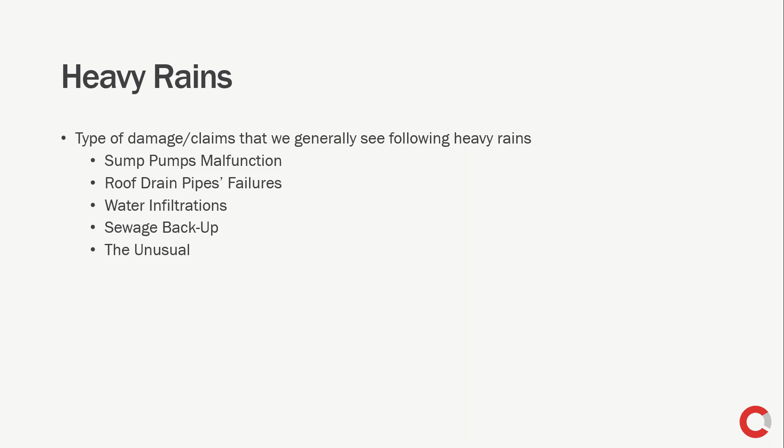I divided my presentation into 3 sections, and the first one is dealing with heavy rains. We all know when heavy rain occurs, water penetrates everywhere, water travels easily, and it can cause significant damage. The typical claims that we encounter when there is heavy rain are sump pump malfunctions, roof drain pipe failures, water infiltration, sewage backup, and as you will see later, the unusual.

The first case study refers to a residential place here in Ontario. It was a small home, and during a severe storm with wind and rain, a tree fell onto the roof of the house. It damaged a portion of the roof and left a portion of the attic space exposed to the environment.

The homeowner requested the insurance company repair the entire duct conduit inside the house, claiming that because the attic space was exposed to the environment, it caused significant damage. There was no doubt that the section in the attic space exposed was damaged by exposure to environment. However, the insurance company was not so sure about the rest of the air duct, so they contacted us and asked us to conduct a thorough investigation of the duct in this home.

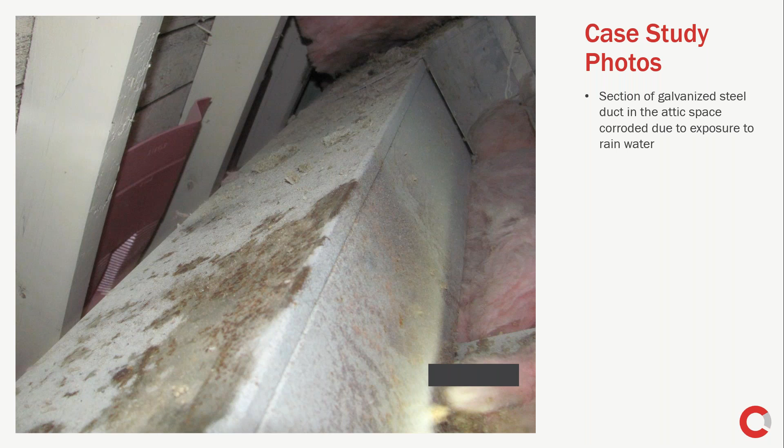So we were equipped with a snake camera, and we went from the roof to the basement and inspected the entire conduit. I'm not going to show all the pictures that were taken, just a few relevant ones. We started in the attic space, and you can see in this image the duct is compromised by exposure to water.

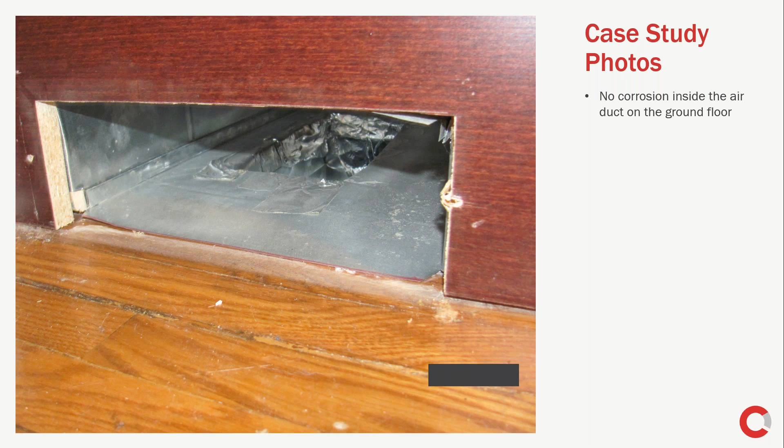Further down, the duct seems to be clean. Considering the age of the house, 40 to 50 years, the condition of the duct is exceptionally good. There is no evidence of significant corrosion or other type of degradation. Moreover, in one section there are spider webs, so when you have water, you don't have spider webs.

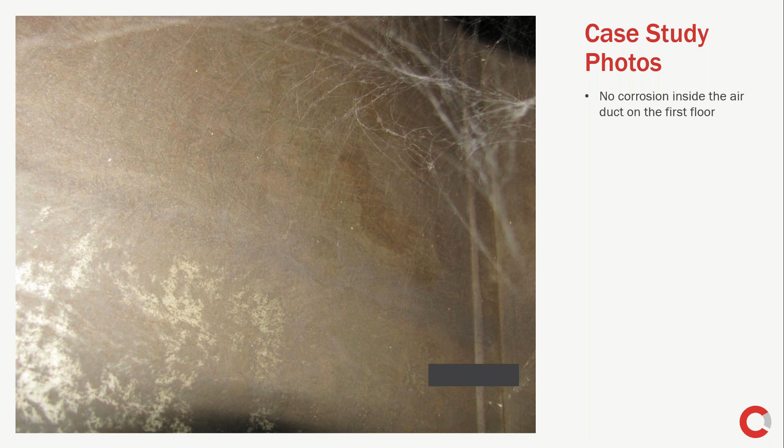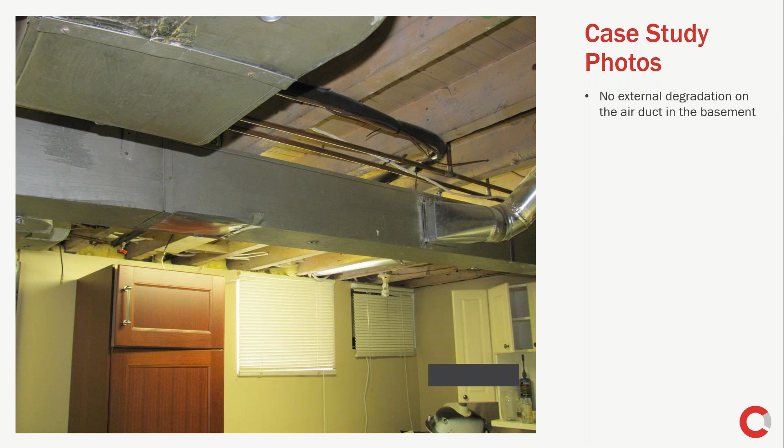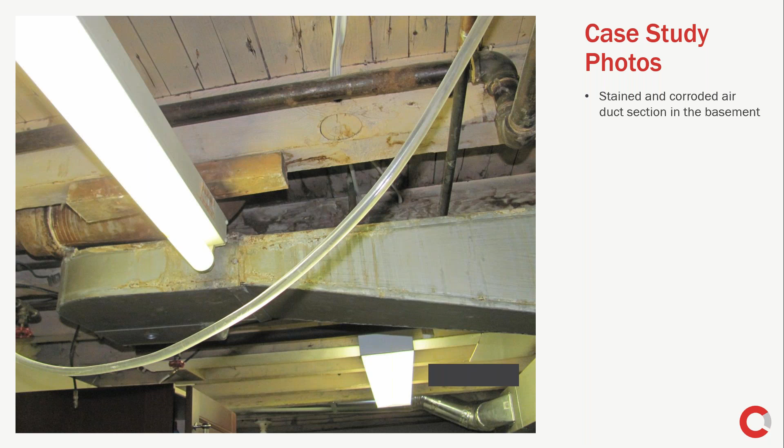I went further down to the basement, and as you can see, the duct in the basement seems to be in good shape, except for a small section which was severely corroded and stained. A close-up view of the degraded section is in the next slide, and you can see the severity of the degradation.

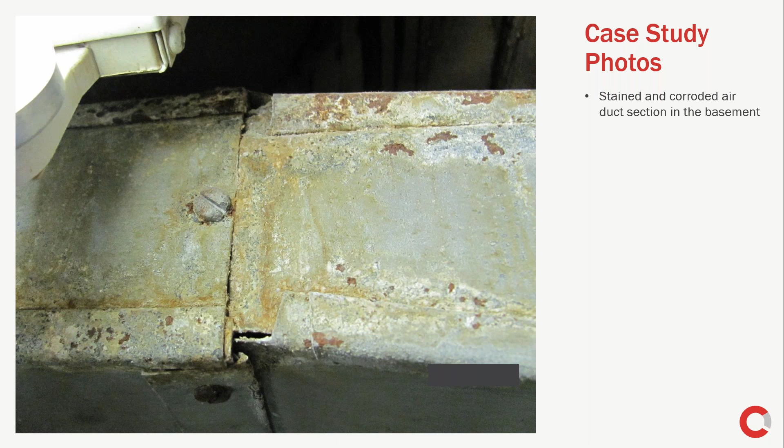So what happened here is the flange degraded, the floor degraded. So every time the toilet was flushed, some of the products ended up escaping and ending up on the duct. So there was no damage associated with the storm or with the fallen tree. It was a historical degradation, and it was negligence on the part of the homeowner.

At the end of the day, based on my comments and observations, the insurance company decided to compensate for the damaged duct in the attic space. However, there were no compensations for the historic damage to the remainder of the duct.

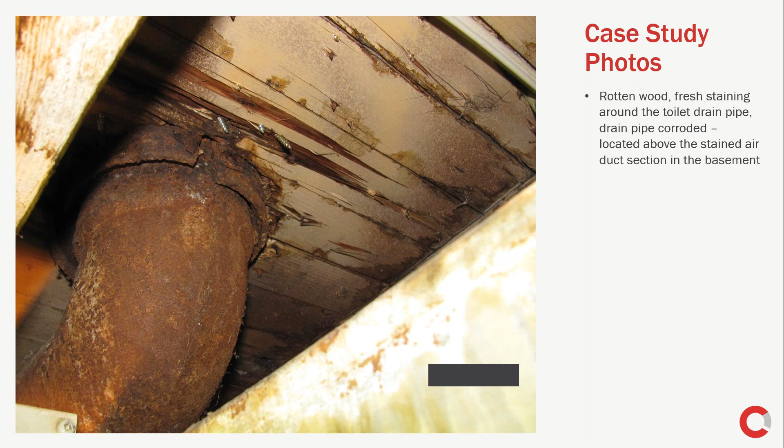Ice can cause a lot of damage inside the pipes because it expands; water expands 9% upon freezing. Ice can also cause damage on the outside to roofs and other structures. Typical damage claims we generally see coming from the formation of ice are frozen sprinkler systems, collapsed structures, frozen pipes, and other plumbing fixtures and appliances.

Freezing in homes can occur if a furnace malfunctions. This can happen if the air intake is blocked by ice formation. Basically the furnace is, for lack of a better word, suffocated. It has no air to breathe, it cannot function, and it eventually stops. This happens quite frequently when there is ice formed on the intake or snow accumulation.

Ice can cause damage on heat pumps even outside the cold season. I was asked numerous times, how can a heat pump freeze when it's summer? This can happen if the refrigerant level is too low, the evaporator coil is dirty, or there is poor airflow. I'm sure you've all seen ice on the air conditioning unit outside your home during summertime. This means the air conditioning unit needs to be looked after, so freezing during summertime is quite possible.

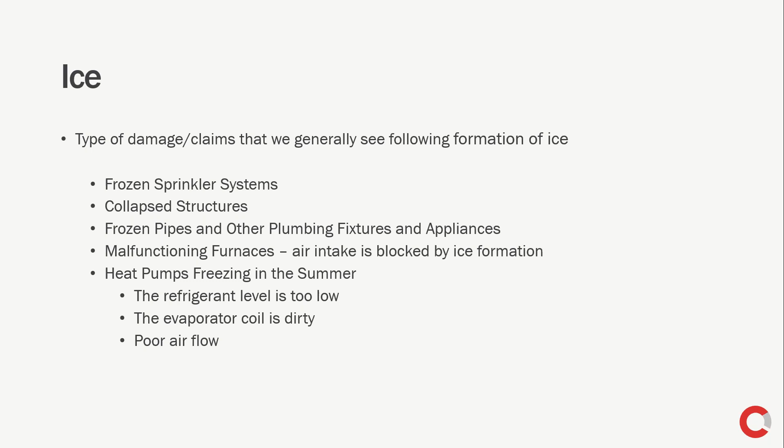The next case study I'm going to talk about is associated with a distance marker installed on a rowing course. On rowing courses, distance markers are installed every 500 meters from start to finish, helping participants know exactly where they are.

One March a few years ago, this particular distance marker simply disappeared from the lake. One day it was there, the next day people walking in the park noticed it was gone. What was left visible from the surface of the lake is one leg. The yellow ball and the red flag are installed to prevent accidents because it was very close to the surface, and to prevent injuries. It was marked so the participants on the rowing course could bypass it.

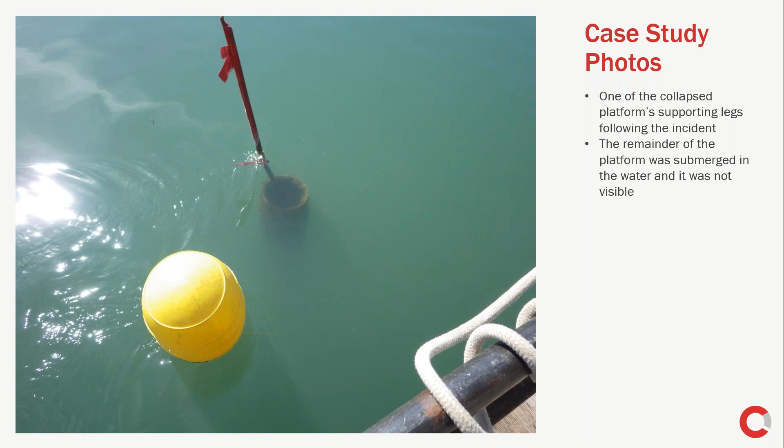The problem was that the entire structure was below the surface of the water and there was nothing visible. So we attended the site to retrieve the structure. This is me geared up, ready to jump and retrieve the platform from the bottom of the lake. Just kidding.

We retained the services of professional divers who helped us retrieve the structure. The job was a very difficult one. It was challenging because the visibility underwater was close to zero. There were some currents and some metal remnants which nobody knew how they were arranged. As you can see, the diver has safety features like a lifeline, two breathing lines, and a communication line.

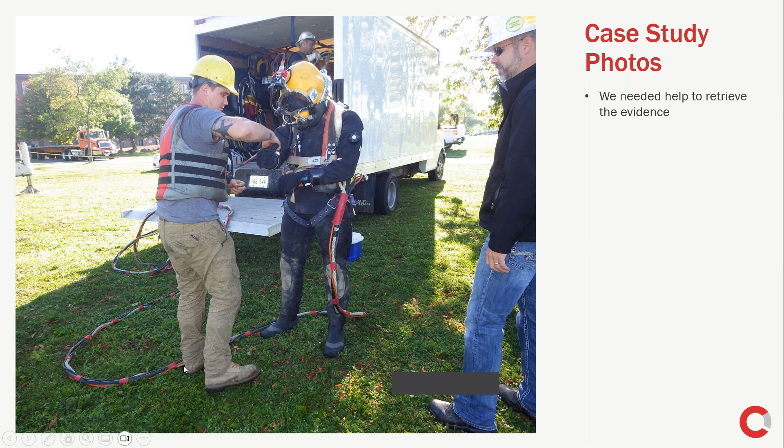So with their help, the remainder of the structure was fished out from the lake and brought to the shore. The incident occurred in March and we retrieved the platform in September. So the platform remained submerged underwater for several months, a condition which changed its appearance.

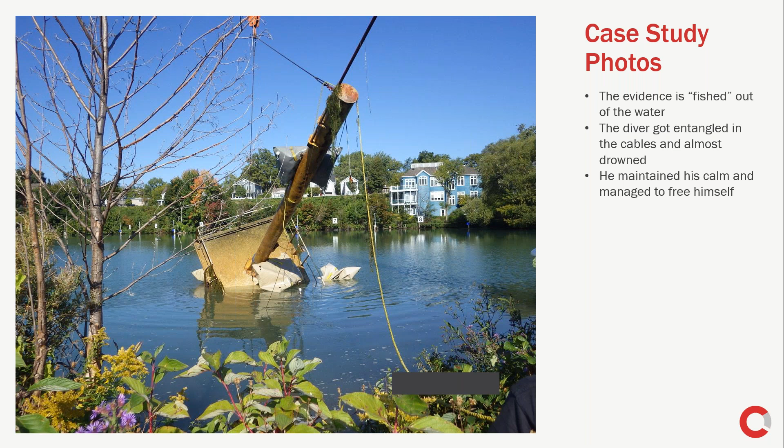The platform was brought ashore and we looked at it. It has 4 legs, and you can see 2 of them were severed. One was bent and mechanically deformed, and the 4th one is in the shadow and not visible, but it was damaged as well. Because it stayed submerged underwater for such an extended period of time, the structure was covered in algae and mussels.

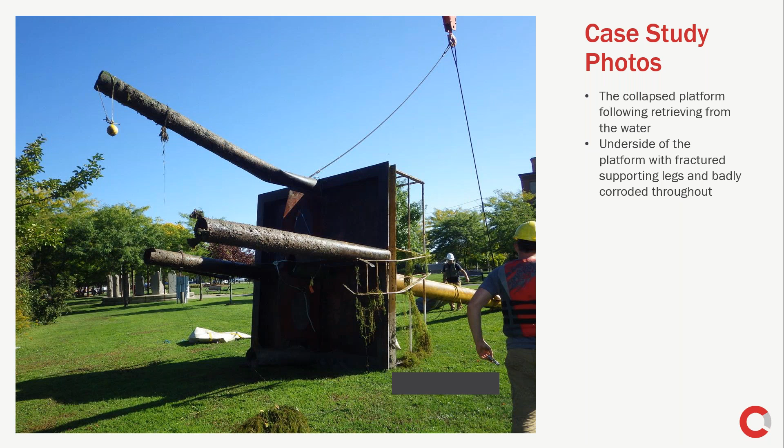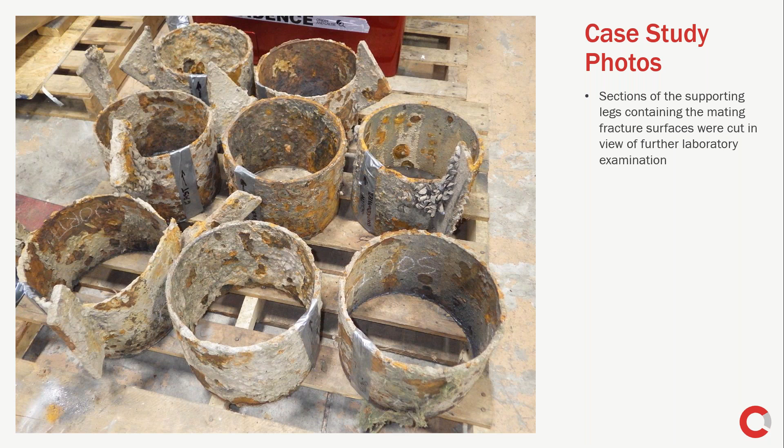It was a difficult task to look at the fracture surface because of severe oxidation and degradation. We cut small sections from the legs and tried to determine what could happen to the platform that caused it to collapse. Cleaning was very tedious because of the extensive damage to the fracture surface. We used special chemicals and managed to look at the fracture surface. This is the appearance of the fracture surface, of the small sections, before being cleaned.

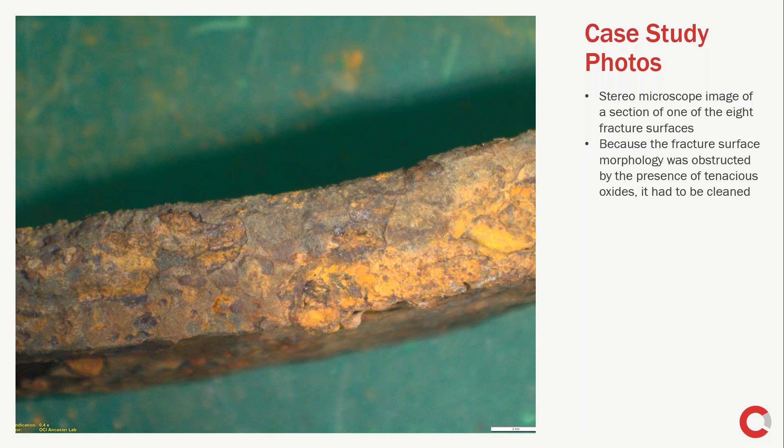After ultrasonic cleaning, we took the samples to be examined under a powerful microscope called a scanning electron microscope. This microscope allows us to examine the fracture surface and features at higher magnification.

The platform was made of carbon steel, which is the most common steel that one can encounter. This carbon steel, when subjected to stress, usually fails in a ductile manner. It means that it has some plastic deformation, some yielding before the final fracture.

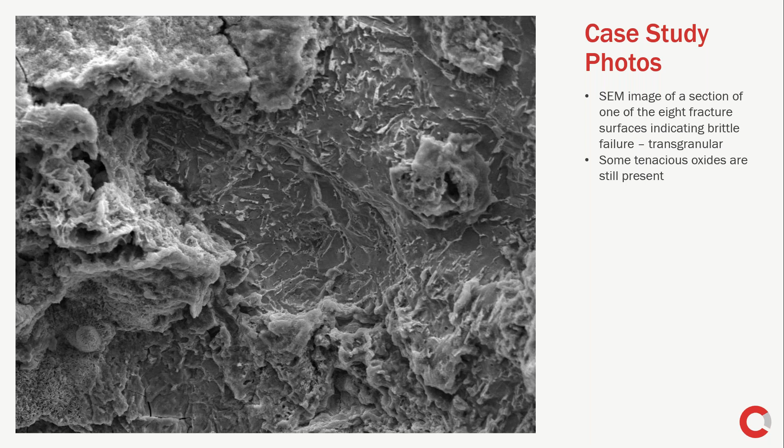However, in this particular instance, when I looked at the fracture surface under higher magnification, I saw typical features associated with brittle failure. What it means is there was no deformation. The fracture was like a glass fracture. It happened all of a sudden without any plastic deformation.

And this tells me -- we also looked at the microstructure. Every material is made out of grains, like ingredients in a food. You put ingredients together and you get the final mixture. Same thing applies to materials and alloys, and carbon steel is one of the simple alloys which consists of 2 phases. There was nothing wrong with the microstructure; no gross metallurgical deficiencies were observed.

So there was nothing wrong with the material. However, it failed in a brittle manner, which it shouldn't. I checked the weather reports, the historical weather in the area at the time the platform collapsed, and I found out that it was very cold and there were strong winds.

So based on an analysis of the condition of the platform, the fracture surface, and weather conditions, I concluded that the incident happened because of ice impingement. In other words, the lake was covered in a thick layer of ice, and because of the winds, the ice was pushed against the legs of the platform, making it collapse.

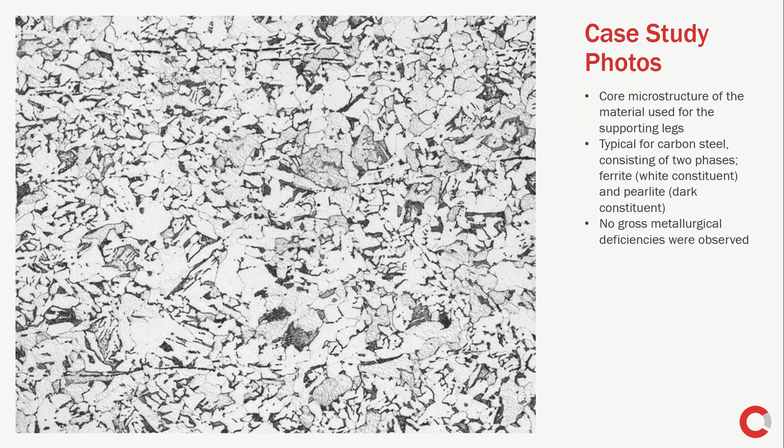The next case is an interesting one, involving freezing rain, ice accumulation, and strong winds. It's an incident which occurred at a golf range located somewhere east of Toronto.

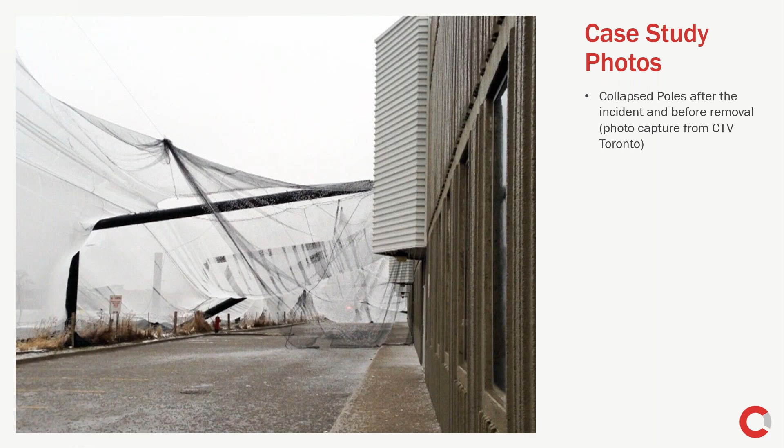During a severe storm and winds, the poles and netting collapsed onto the close by building, causing significant damage. This image was taken from CTV Toronto, because by the time we were assigned to this claim, the site was cleared for safety reasons. At that time, there were strong winds and freezing rain, and you can see ice pellets on the ground. By the time we arrived, it was nice, shiny, and sunny, and this is how we saw the site.

You can see that only one side of the netting collapsed. The other one remained intact.

The steel poles holding the nets were brought in from California and were welded from 3 sections. They were welded by the manufacturer, not on site, so they were just planted here. They were brought already welded, planted here, and then the netting was connected.

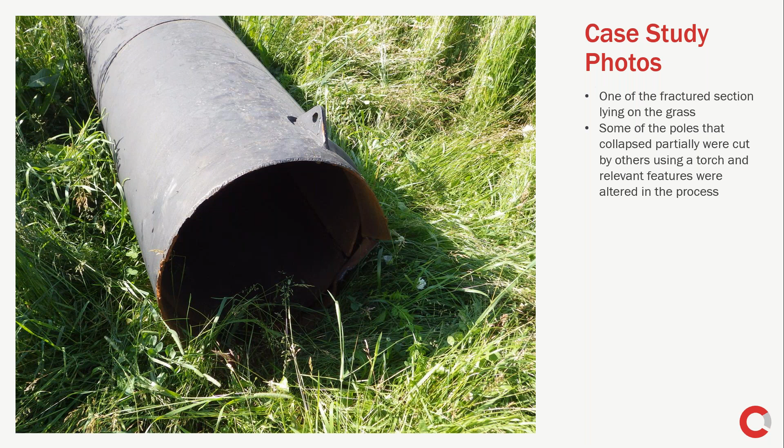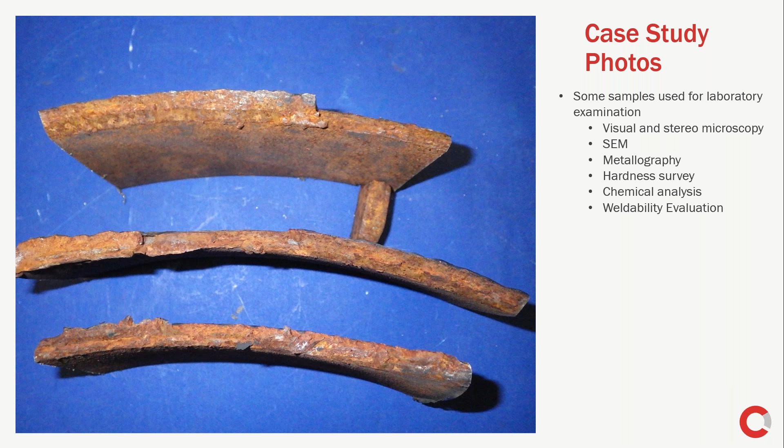It was a joint examination with other parties, and we jointly selected the samples for further lab examination. The lab examination included visual and stereo microscopy in as-is and clean condition, examination of the fracture surface under scanning electron microscope, metallography to check the soundness of the microstructure, hardness survey to check the heat treatment of the steel, and chemical analysis to determine whether the chemistry conformed with the designer specs, as well as to check the weldability of the steel. These are a few samples we selected for examination.

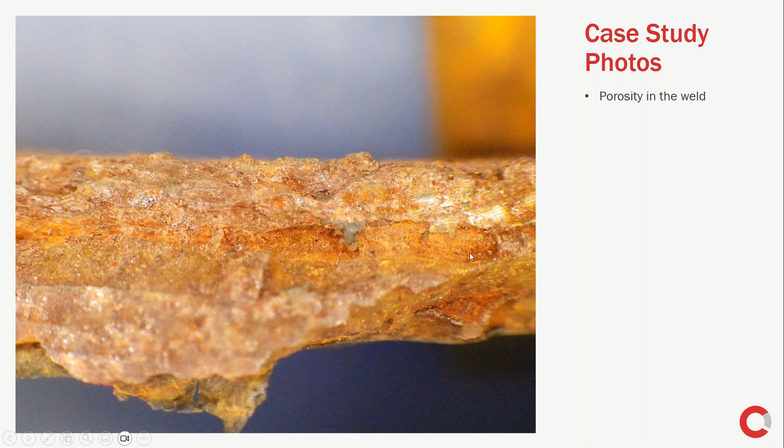Looking under the stereo microscope, we saw large voids in the weld. These are undesirable features because they act as stress concentrators and diminish the load carrying capability of the weld. Further examination revealed not only large porosity, but also inclusions, which are also undesirable in a weld.

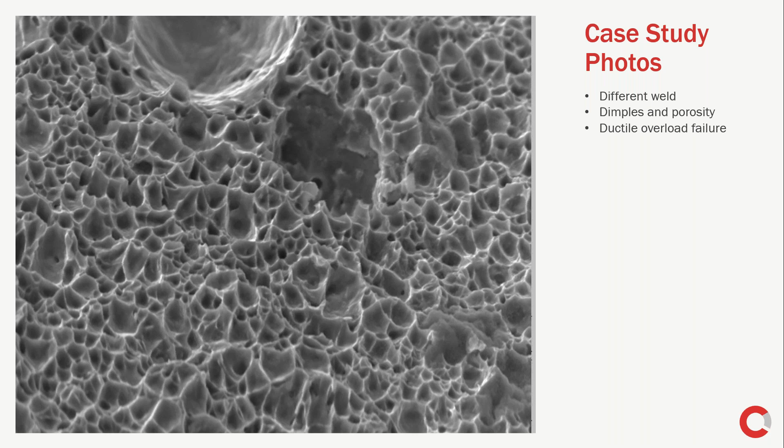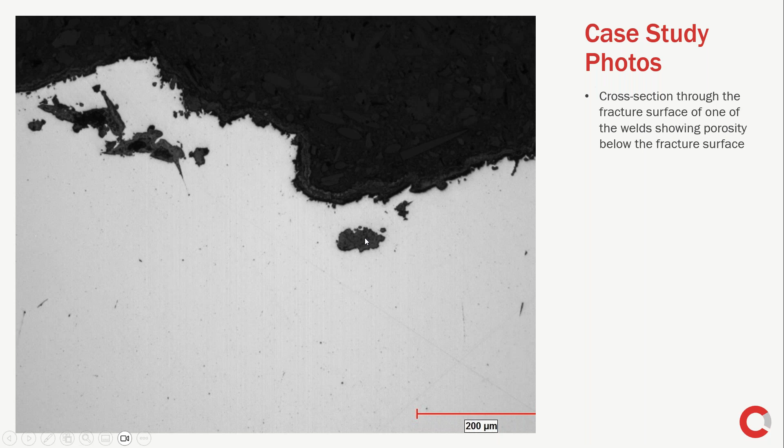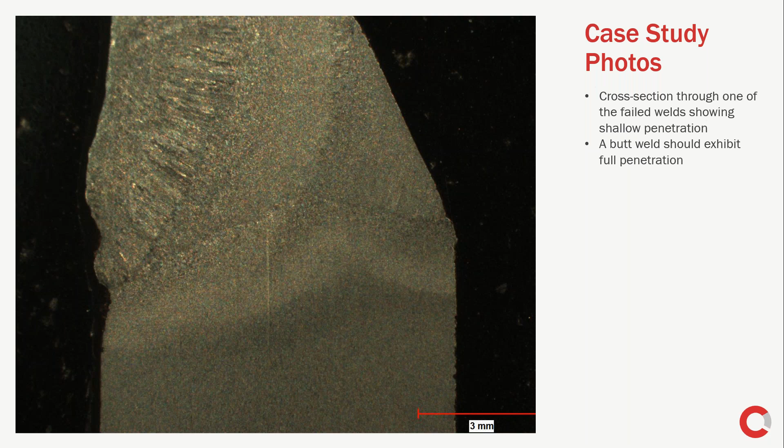Further metallurgical examination in the cross-section revealed porosity below the fracture surface. This is the fracture surface on top, and those dark features represent porosity, which is undesirable. The weld between the sections should have shown full penetration; however, it shows only shallow penetration, so the weld was substandard.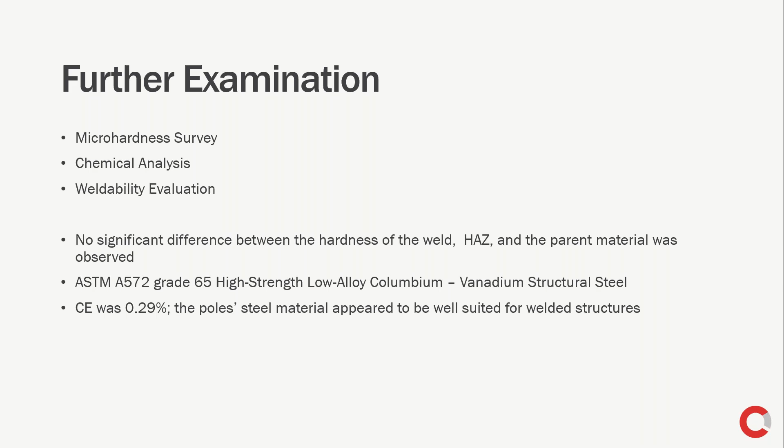We conducted a microhardness survey, chemical analysis, and weldability testing. We did not find any significant difference between the weld material and the parent material. The steel was fit for the application and was weldable. It must be said that some alloying elements make welding more difficult or impossible, but in this particular case, the material was weldable.

The conclusion was that the failure appeared to have occurred by dynamic overload at the welds. It was not only the ice formation on the netting, but also the drag caused by the wind. The failure was possible because of a combination of factors, like undesirable defects in the weld associated with the weather conditions.

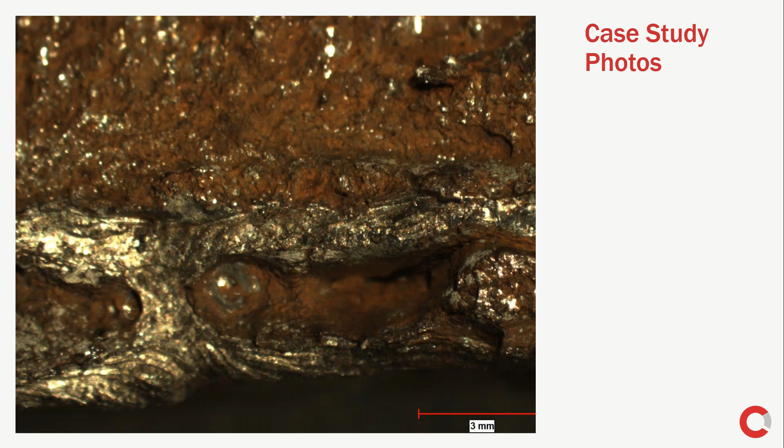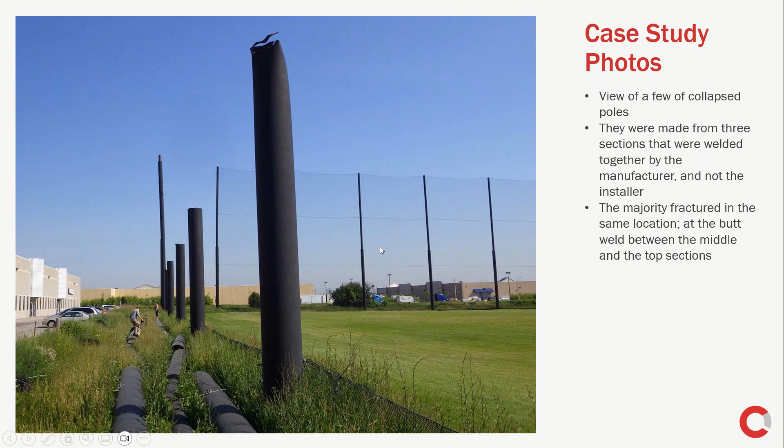People were asking, the insurance company asked me, how come only one side of the netting collapsed and the other did not? Looking at this image, you can see this side of the netting collapsed entirely, while this one survived. This section runs north to south, and this one runs east to west. The winds were blowing almost east to west, so the wind was blowing perpendicular to the netting on this side, and running parallel to the netting on the east-west side. So there was a lot more stress accumulated on the north-south section compared to the east-west section, and this explains why it survived.

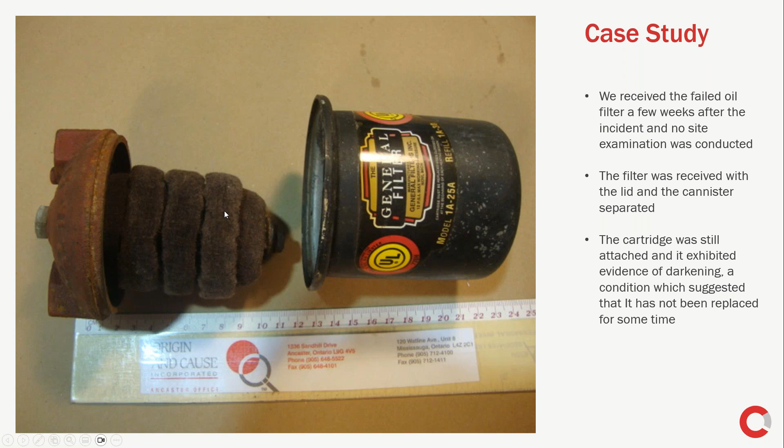And an important observation was that the cartridge inside the filter was still attached. And this cartridge showed signs of darkening, which indicates that it had not been replaced for a significant period. So regular maintenance and timely replacement of oil filters are important to prevent issues down the line during operation.

So continuing with our case study photos, we have a close-up of the manufacturer label on the filter. So we can see here highlighted on the label, the manufacturer provides clear instructions for the maintenance. So the label says the cartridge must be replaced when it's clogged or at the beginning of the heating season. And these instructions emphasize the importance of regular maintenance, ensuring that the oil filter functions properly.

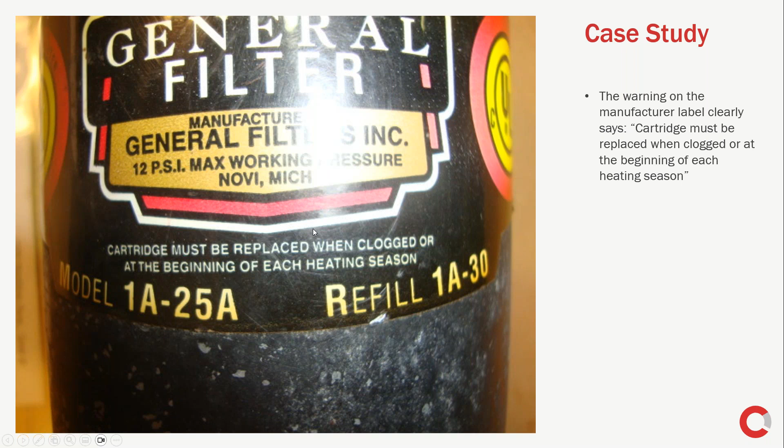And the label's warning points to something important, which is that neglecting to replace the cartridge as recommended can lead to issues like clogging or reduced efficiency. And in our case study, the darkened cartridge that we saw in the previous slide showed that it hadn't been replaced for a considerable time.

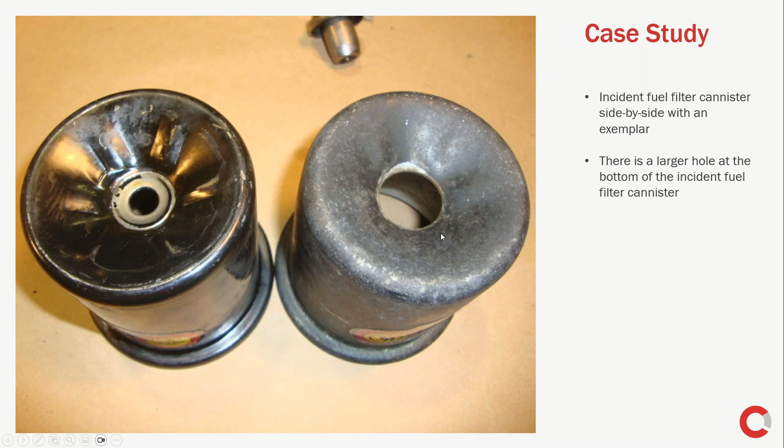Next, we have a side-by-side comparison of the incident fuel filter and a canister that we procured as an exemplar. So the canister on the right is the incident one, while the one on the left here is the standard that we used for comparison, the exemplar. And a noticeable difference between the two canisters is the size of this hole at the bottom. The incident canister obviously has a larger hole, and this suggests that it might have experienced an abnormal pressure buildup or some type of physical damage.

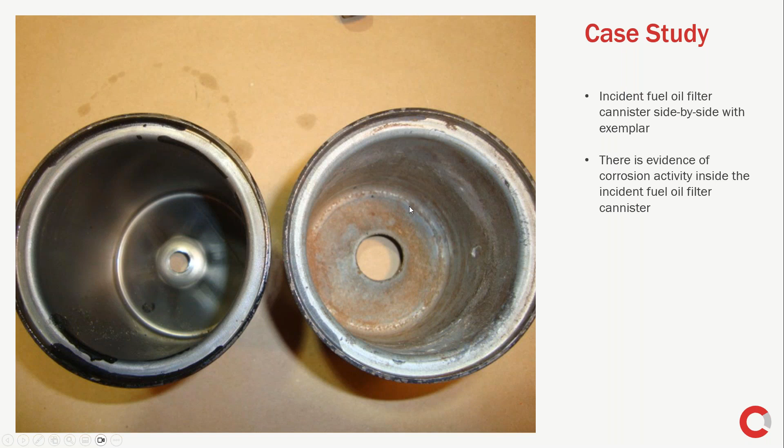In this slide, we're continuing the comparison between the incident fuel filter and the exemplar, but this time we're focusing a little bit more on the interior of the canisters. And on the left, again, is the exemplar, which appears relatively clean. But on the right side, we see the interior of the incident canister, which has started to show signs of corrosion activity. So this evidence of corrosion indicates that the canister was likely exposed to moisture or other corrosive elements over an extended period of time.

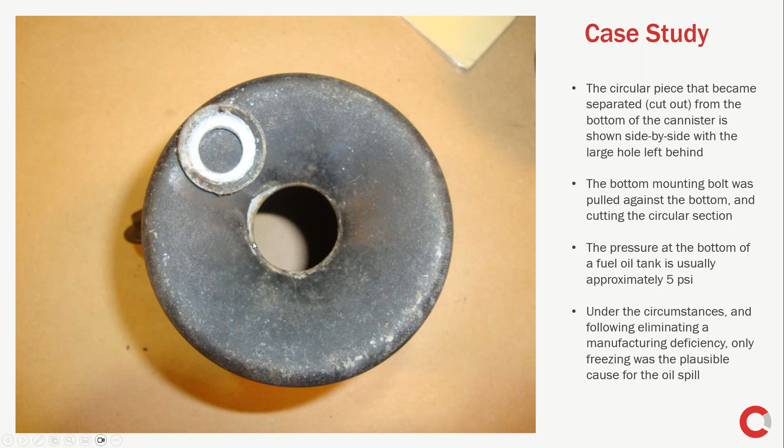Sorry about that. Right, so in oil installations, water can accumulate due to condensation, and we know that water is heavier than oil, so it makes its way to the bottom of the tank. And once the oil is set to run out of the tank towards the furnace, because the water is at the bottom, water will run out first and then accumulate in the filter.

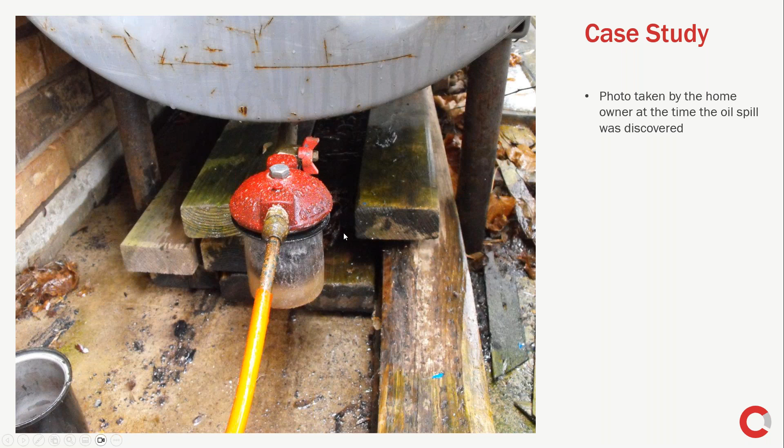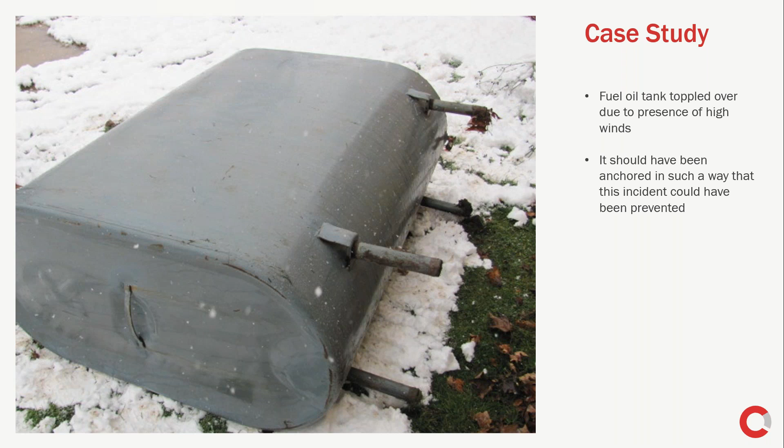And proper anchoring is important, really, to ensure that tanks remain secure in all types of weather conditions. This means using appropriate anchoring systems that can withstand environmental forces and prevent the tank from moving or falling over. And by ensuring that tanks are correctly anchored and regularly inspecting the anchorage, we can prevent these accidents and maintain the safety of the fuel tanks.

Here's a bonus one, actually. Since we're on the topic of oil filters, it still has to do with the environment. I believe personally that it has something to do with the weather, but I will let you be the judge on that one. So this is a different example of how failures can occur in these types of oil systems: the vent pipe of an indoor oil tank.

The oil spill occurred because the delivery driver didn't hear the vent whistle, which is an indicator of when the tank is full. Vent whistles are installed on vent pipes of fuel oil tanks, and they are designed to produce a whistling sound as air escapes from the tank during the filling process. When the tank is nearly full, the rising oil level blocks the vent pipe, and this causes the whistling sound to stop, which serves as an audible signal to the delivery person that the tank is full and you should stop adding fuel to prevent overfilling.

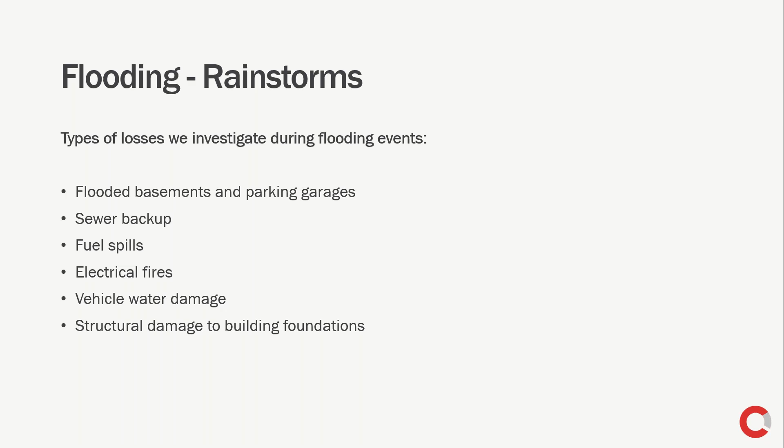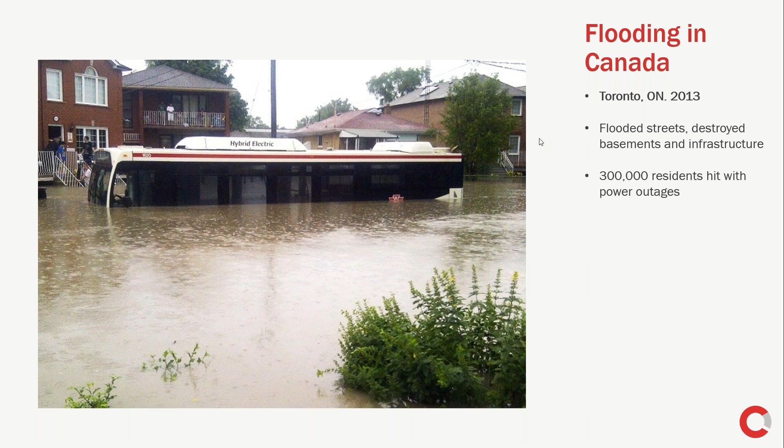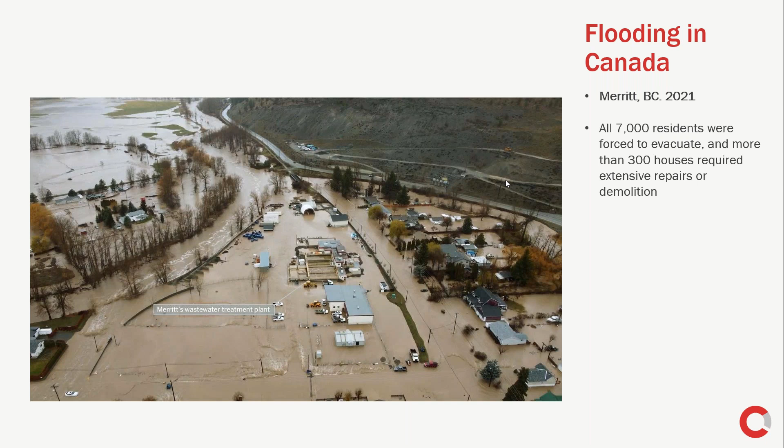In Canada, there are many examples to share. I'm just picking up on a few. Merritt, BC in 2021, all 7,000 residents had to be evacuated, and just less than 1,000 homes were damaged, 300 of which had to be partially or totally demolished. You can imagine the devastation.

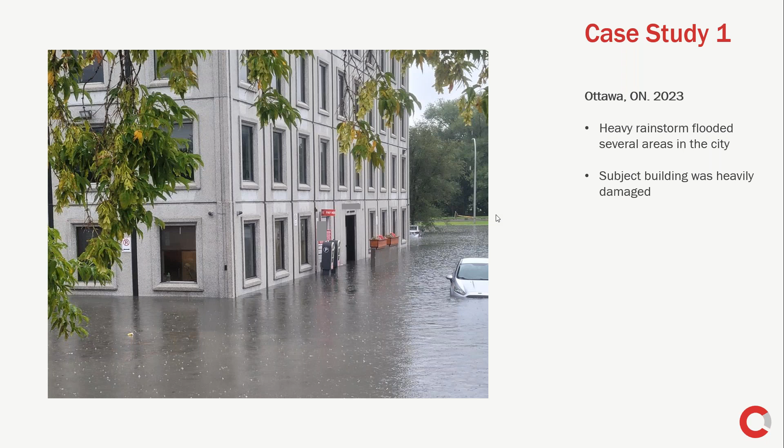That brings me to my first case study, and this speaks of an event that occurred in Ottawa in 2023, where heavy rainstorms flooded several areas of the city, and the subject building was heavily damaged, as you can see from this one photo. The main floor was inundated, and the basement, which was fully occupied, was full of water all the way to the top, so significant damages to elevators, business interruption, and a number of things in and around the building.

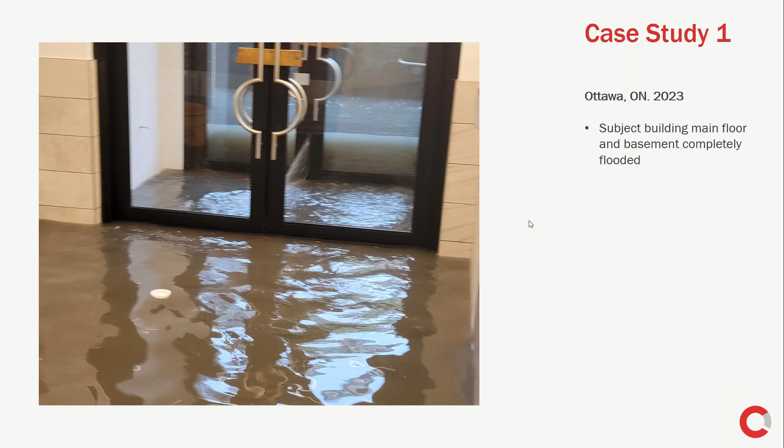So one of the contributory factors to a flooding loss like this has to do with sump pumps, which are installed at the lowest level of a building and are meant to remove water, either groundwater or rainwater, depending on the installation and the design. There's multiple options that we can see and find. In this case, that particular building had multiple sump pumps, and well, we saw some failures. There were also obviously other contributory factors that created this loss.

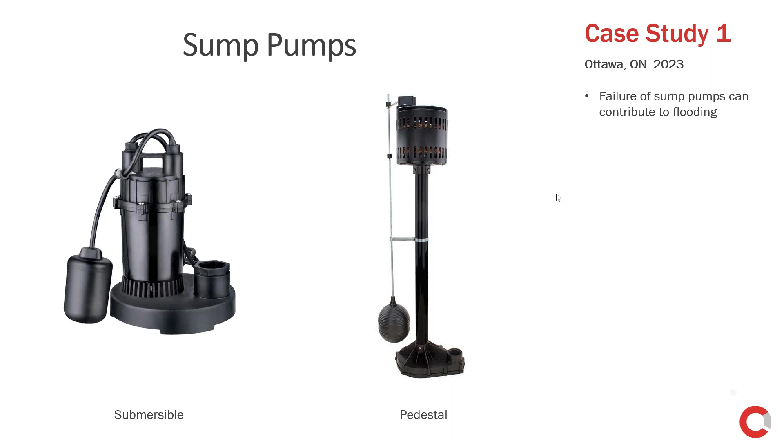But in general, most residential and commercial sump pumps are one of these two types, either submersible or pedestal pumps. They both operate under a similar principle. There's a motor, a pump, and a float switch that activates the pump either to turn on or off. Inside the motor for these pumps, there are some components that can be damaged, including the start capacitor. And when these electronic components fail, the pump simply wouldn't start.

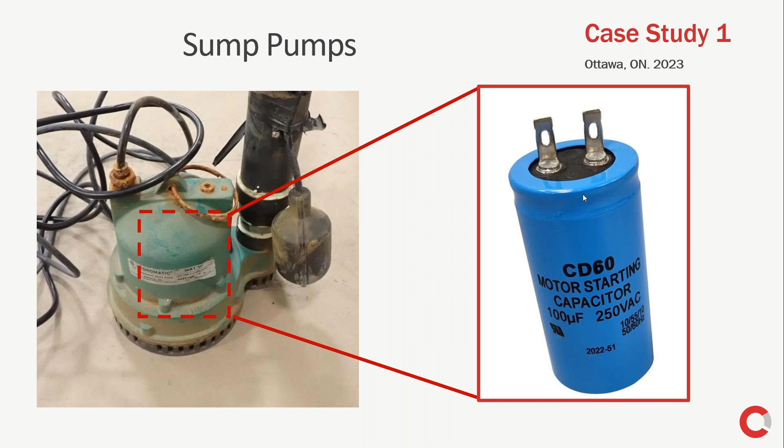And again, I always tell my clients to remember that these pumps are mechanical components and they're bound to fail. So there's always the need to have redundancies in the systems. But in any case, this is one of the reasons why they fail. If the pumps are relatively new, then there's no good reason for them to fail, and we can move ahead and examine them. If they are close to their lifespan, then the decision rests on the insurance company and the adjusters whether to move forward with additional work and possible subrogation.

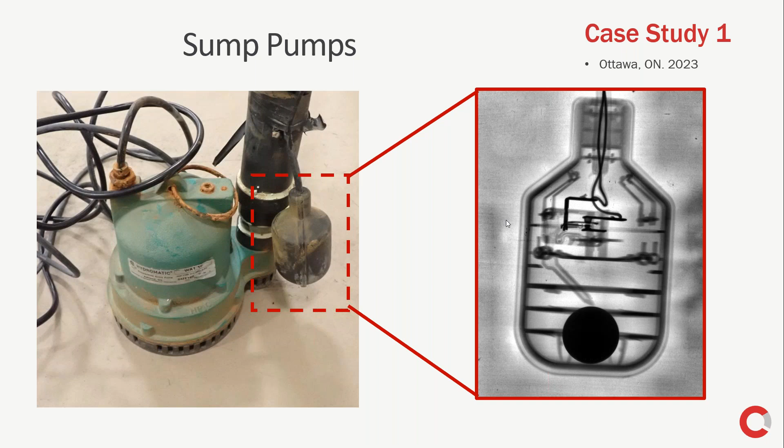They catch with other equipment in the sump pit, or there's always vibration in this system, so they're allowed to move if they're not restrained properly, and they get caught with the walls of the pit or something else. But let's look at this particular case.

So this one shows, let me just walk you through the anatomy of that float switch. It's very, very simple. There's a ball inside that moves up and down when the position of the switch changes, and that activates a mechanical lever, and that lever opens or closes an electrical circuit. That electrical circuit is in a micro switch, and that switch is what I'm showing here on the right.

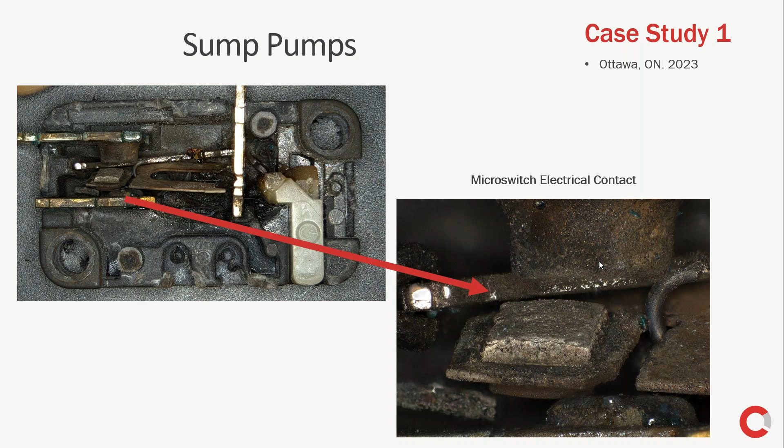And on the top part of that image, there is a shadow showing where another pad should have been. This basically tells us that one of the pads disconnected or was not properly attached to begin with and came off. Obviously, if you have a loose metallic component in a system like this, it's most likely going to contact something and create a short circuit, and that's most likely what happened here.

We did find the missing pad. This is the back side where it was supposed to be welded to the tab. Again, in this case, it was clearly a manufacturing issue. This was not a very old pump, and we were lucky to find all the pieces and able to identify the issue.

Now, it's also interesting to keep in mind that from a technical point of view, we could have gone a lot further down that road and found whether the materials were proper, whether the welding was proper. That typically happens when we have different manufacturers manufacturing the individual components that go inside. In this case, that wasn't necessary, but keep that in mind in case it's needed for your claims down the road.

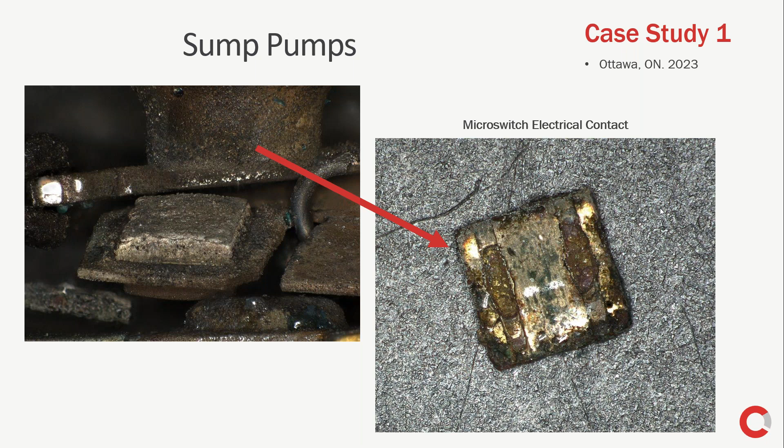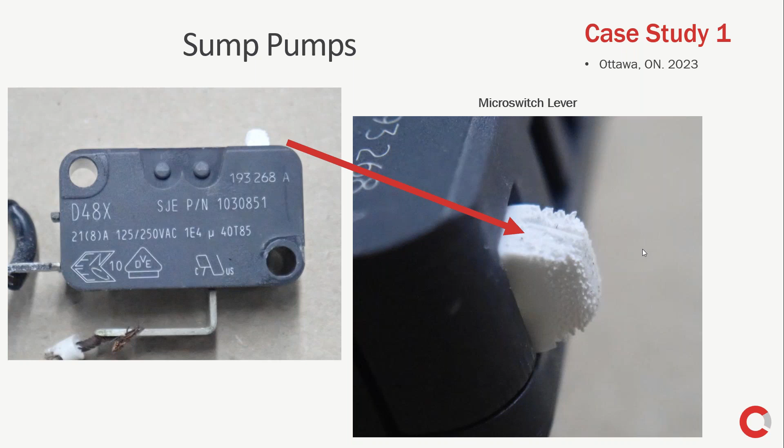So we opened the micro switch. You can see here clearly that lever has been affected, but only the section of the lever that is outside the micro switch. Remember, this micro switch is inside the sealed float switch, but it's interesting that only that section of the lever is affected. At this point, we obviously have to understand why, in order to try to find the root cause.

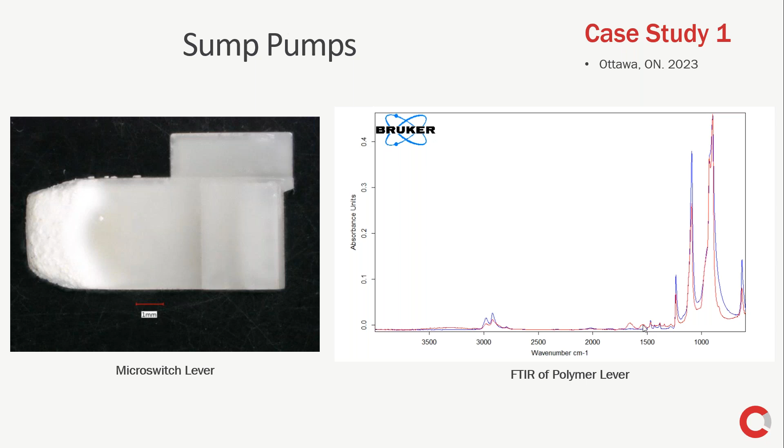So we did some analysis on that very tip that's discolored and damaged, as well as on the core of the material away from that damage. What we found during the FTIR analysis of that polymer is, around the 1500 to 1700 wavenumber mark, we found some evidence of degradation. We can see that highlighted here, where these two peaks I'm highlighting are clear evidence of structural degradation in that polymer, which tells us that something inside had damaged that material.

Now, when we do the analysis on something like this, we know there's no water coming into the float switch that could have done this, and it doesn't look like a liquid because there's no damage anywhere else. So our analysis pointed to a possible off-gas from either some of the glues used to seal the float switch or some of the other components that were off-gassing inside.

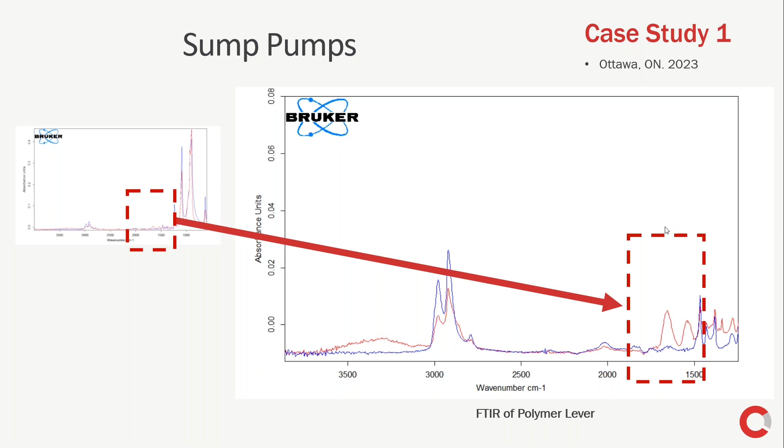At that point, we had enough evidence to close our file, and our client was able to recuperate on that claim. But we had the opportunity, or we could have done additional testing, such as GCMS, in order to understand the particular type of material or compound causing that damage, and further prove that it was some off-gassing material.

So in terms of lessons and conclusions learned for this case, remember that we had multiple contributory factors, including manufacturing defects. As a result, our client received a settlement and our file was closed.

We also learned that it's always important to give an opportunity to inspect the scene and all possible contributory pieces of evidence, because that's critical not only for your side, but also the other side, so everyone can be on the same page when doing an analysis.

Also remember that when presented with one cause of loss, it's important to always confirm if other possible causes were eliminated, and that will give you an advantage moving forward on your claim.

I have a second case study related to a fuel oil tank. I'm going to continue the trend my colleague Paul started. This one again relates to flooding or severe rain causing flooding. The claim happened in Markstay, Ontario in 2015, and was related to the tank overturning due to inadequate installation during the flooding.

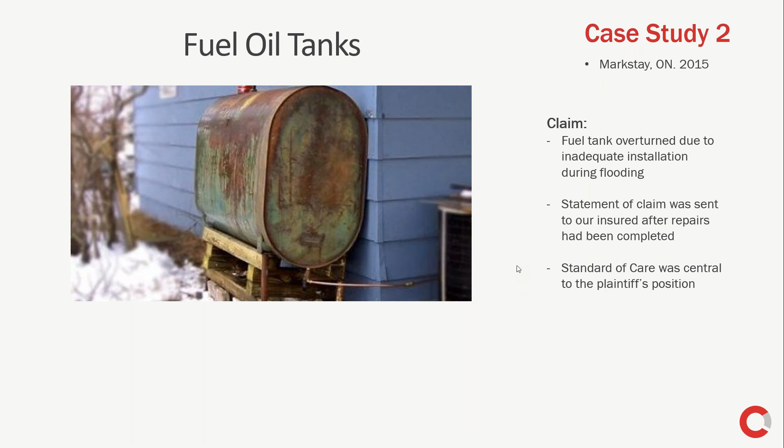The statement of claim in this case was sent to our insured after all repairs had been completed, and that's key to the investigation because we didn't have access to any of that evidence firsthand. They focused on the standard of care, indicating that the installer, our client's insured, had done a poor job, and we were tasked with understanding whether that was the case.

This investigation went back and forth over several years, and I personally wrote three reports. I had consultants on the file from my company, and we were able to do a complete analysis, but I'm just going to summarize some of the important points here.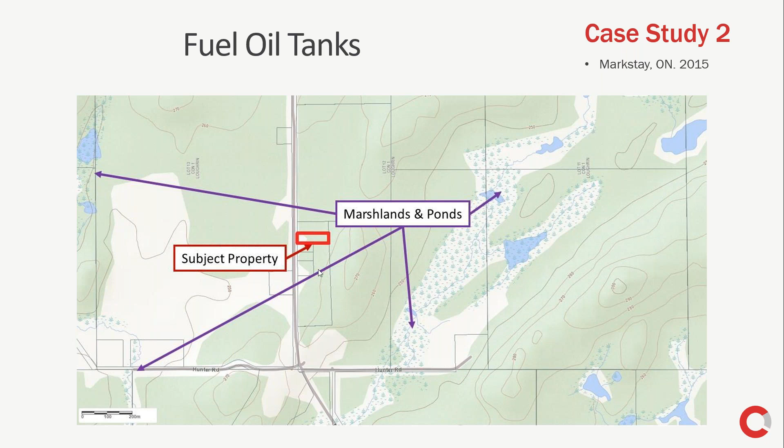In the plaintiff's expert report, they claimed that the subject property was very close to marshlands, ponds, and creeks, and as a result of the severe thunderstorm that happened at that time, the subject property flooded and the tank floated, overturned, and spilled.

We were able to review some simulations, and this was a 1,000-year event — basically the most rain this area would have received in a very long time. The simulation proved that the subject property was not subject to flooding during this very heavy simulated flooding event.

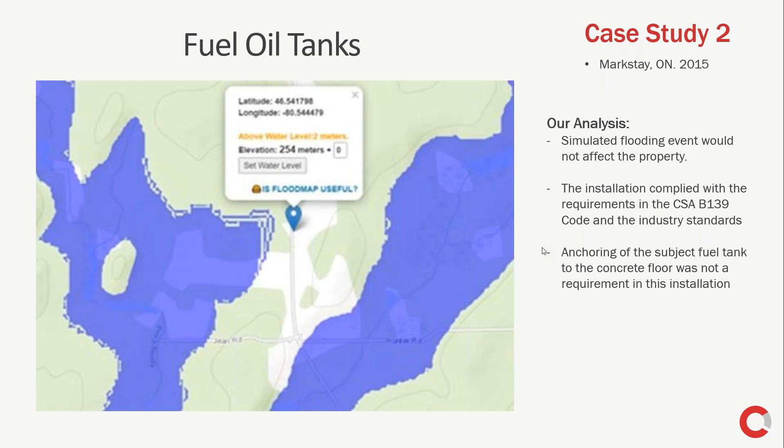That led us to show that the installation complied with the requirements of the code. Remember, the code in this case, CSA B139, is the industry standard applicable for the installation. The plaintiff claimed that the tank should have been anchored to the concrete floor in the basement, but the reality is that the code applicable at that time did not require the tanks to be bolted or anchored to the floor.

Because of the lack of information we had on this file, we took some maps and pictures from maps, including one that clearly showed the property was not in a floodplain or on a low point.

There were other factors to consider, such as comprehensive inspection reports done on the installation after the installer, our client's insured, had finished the work, over the years. One of the big points of this investigation was whether the area was part of a floodplain or flooding was anticipated.

The installer at the time only had to comply with this particular clause in the code if he knew or was informed that the area was a floodplain or was expected or anticipated to be flooded during a heavy rainstorm.

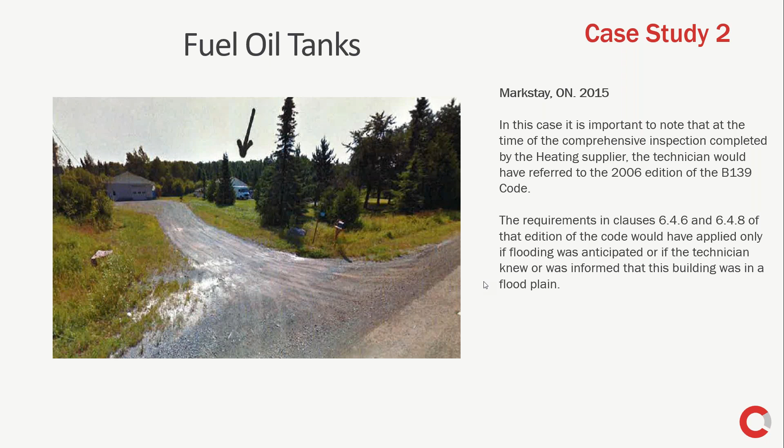Some of the photos we found in the documents from this location show a basement in a rural property, unfinished, with concrete floors. There was a sump pump in the sump pit, and everything pointed to the basement not being completely dry, which is very normal for a rural building, because you'd expect some groundwater may be coming in, and that's why you have the sump pumps there.

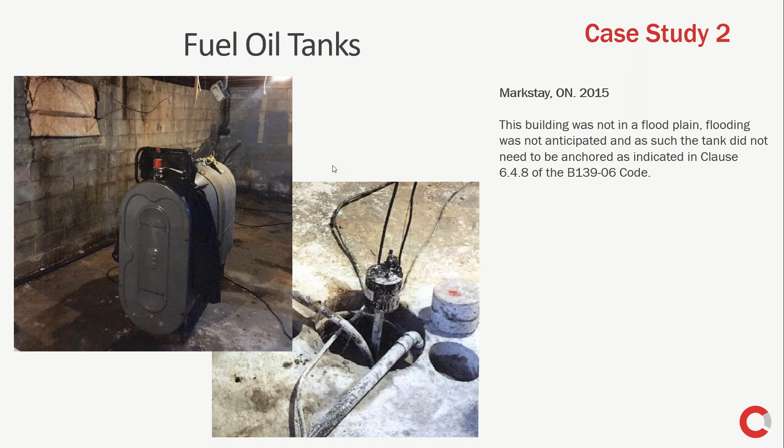In this case, there were two sump pumps, which indicates the homeowner had that provision in case something happened to one — he had a backup pump, which was good.

As you may know, in many of these fuel oil losses, the cost can rack up quickly. In this case, part of the house was demolished, and the foundation had to be excavated just to remove all the oil from the soil. One of the messages we want to convey is that if you must deal with one of these claims—and again, these claims don't occur as often as they did approximately 10 years ago—you have to make sure it gets investigated as soon as possible, and by the right people.

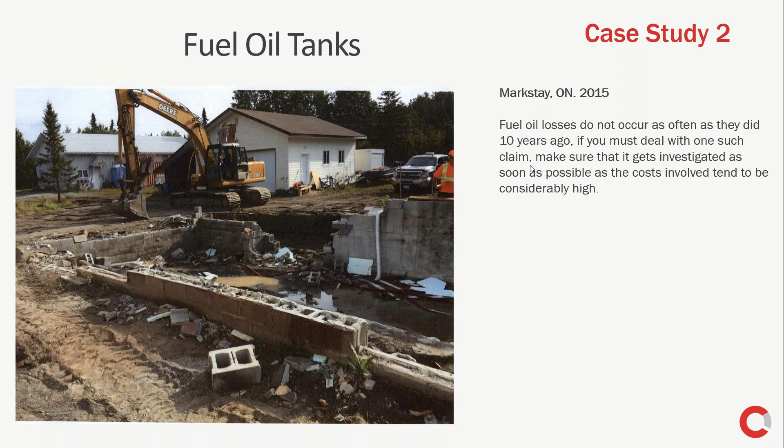So in terms of conclusions and lessons learned from this case study, we helped get to a position where our insured was not liable, and our case was closed. I just want to point out that timing of notices to third parties is critical.

If you have a chance, give the other parties an opportunity to inspect the scene or installation prior to major repairs being done. Obviously, some remediation has to start right away, but try to give other parties an opportunity to gather evidence as well. This is very helpful for everyone, because as experts we're not depending on pictures taken by someone else—we often don't have notes or other points of reference besides those pictures, and if they're not great, then we are very limited.

Also note that third-party expert reports need to be very carefully reviewed by your own expert. In this particular case, the plaintiff's initial expert report appeared to be very solid, but during our review we found significant errors in their evidence and premise.

And that's it for me today. I hope you enjoyed it. Any questions, Mark's going to take care of it.